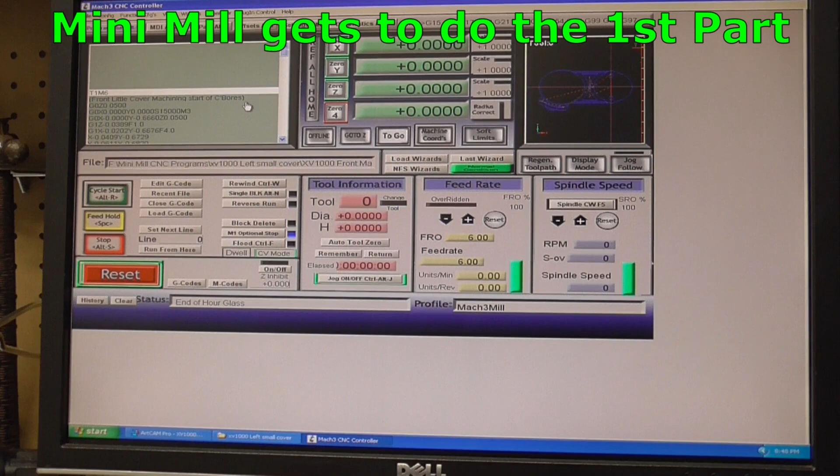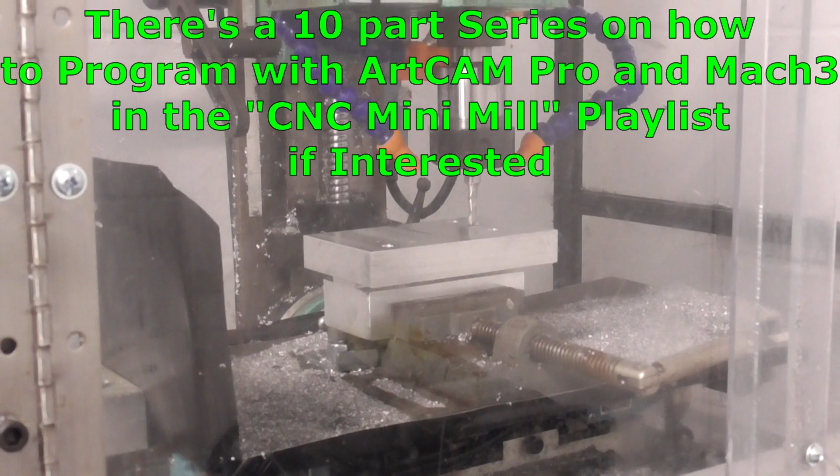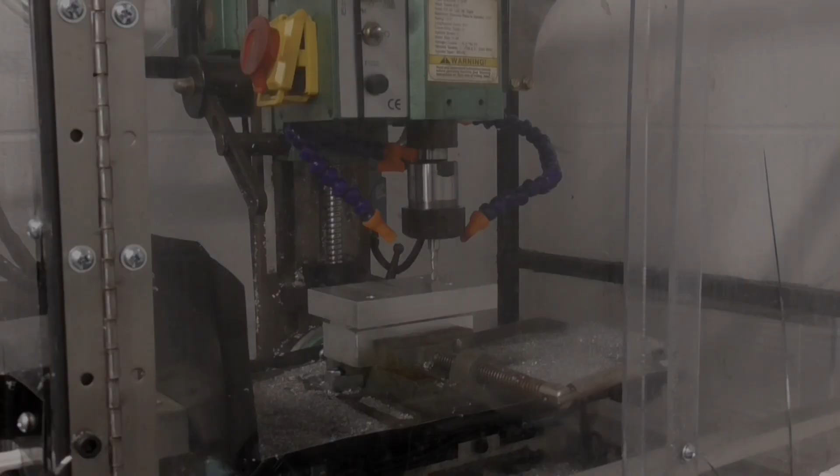So now, over on the Mini Mill, we've got our part set up, and I'm using flood coolant. I'll set the camera up and we'll let it take off and start cutting, and we'll just record as it goes. Let me get the camera set down here and get a good view, maybe it won't splatter too bad, and we can see as it cuts along on this program. I'll turn the coolant on so it starts cutting.

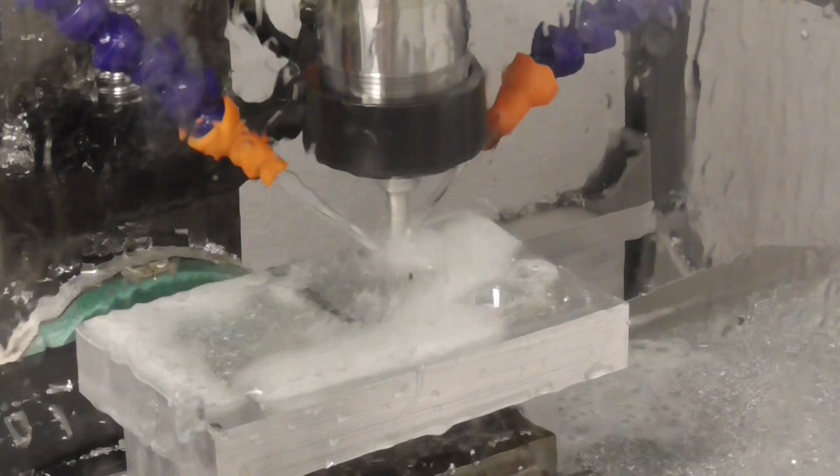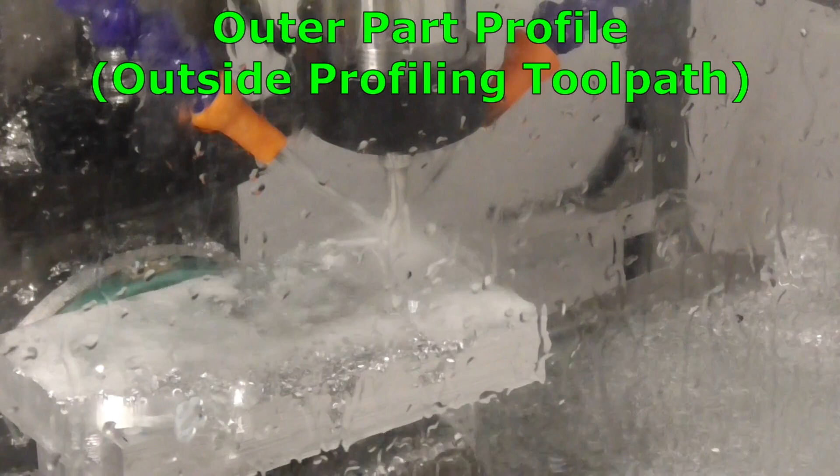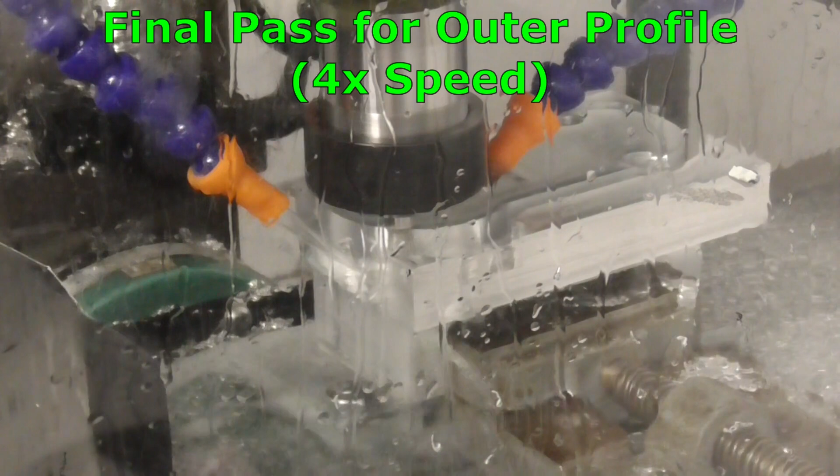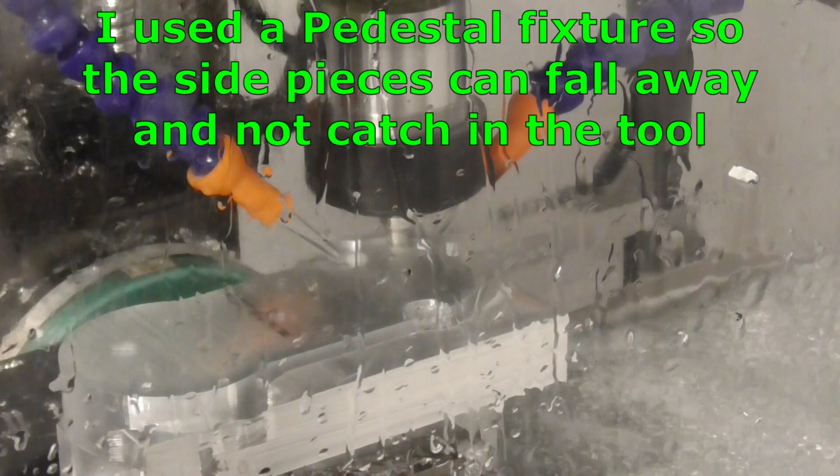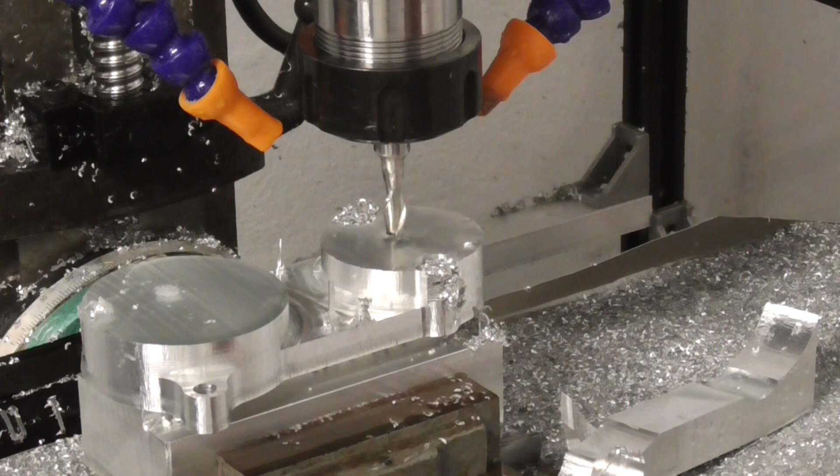And there we go, so we got our first step done. Swing the doors open so we can see what's going on. And it looks like everything went well.

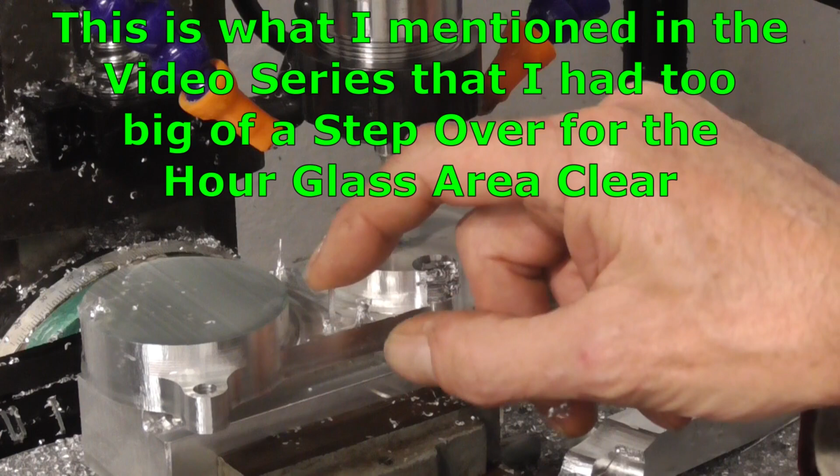This is just leftover from it going around, but it cut good. And right here it looks like I didn't get my step over quite right on that area clear in the middle, because it left some little pointy things, but I've got to sand that anyway, so I can adjust that in the program and get those off. They're just little pieces of aluminum standing up right there, but all in all it looks good.

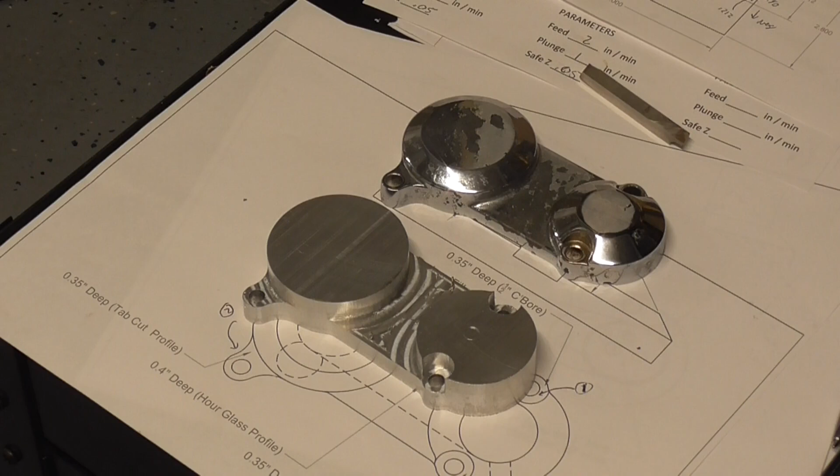So we'll raise up our Z-axis and get him out of there, clean him up a little bit, and see what it looks like. Alright, so after wiping everything off, we did pretty good on our first pass.

You can see right here these little nibs where I didn't do my step over right on this area clear, so I'll have to adjust that. But overall, the rest of the program looks pretty good, and I'm going to sand all that away and make it nice and pretty.

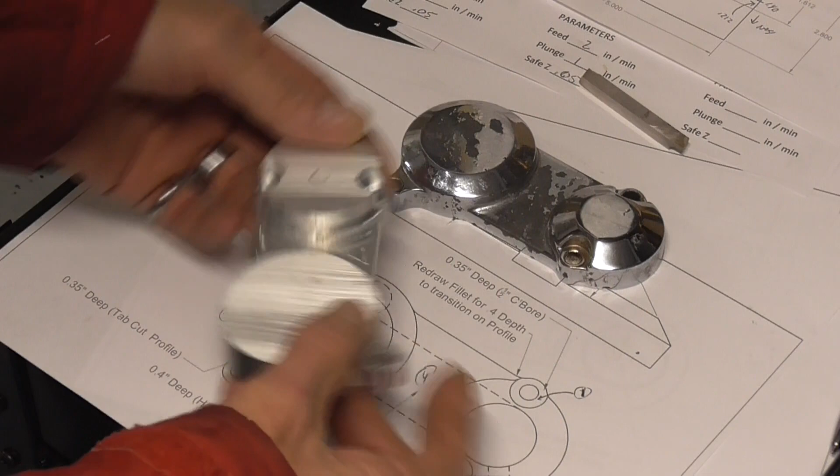And then our next stop is to head out to the lathe where I'm going to cut these tapers on by hand, because I can get a better finish than the Mini Mill can do. And then we'll bring it back and flip it over in the Mini Mill, and we're going to cut out these reliefs for the back of it.

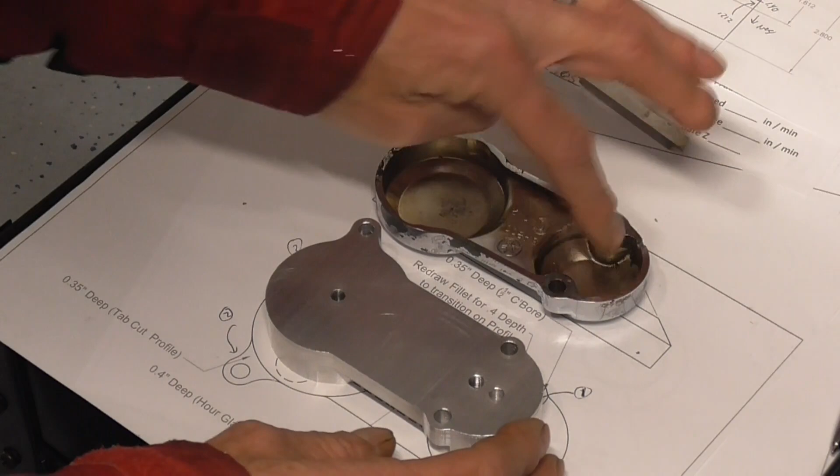Since the Mini Mill can't put a nice smooth surface on here like I can with the lathe, I'm going to cut these little angles on the lathe. I made a little fixture that zeroes the part so I can spin it around and cut that. I'm not going to spin it real fast because it's imbalanced on the lathe, but we just chuck it up like that and it'll spin around on that center point.

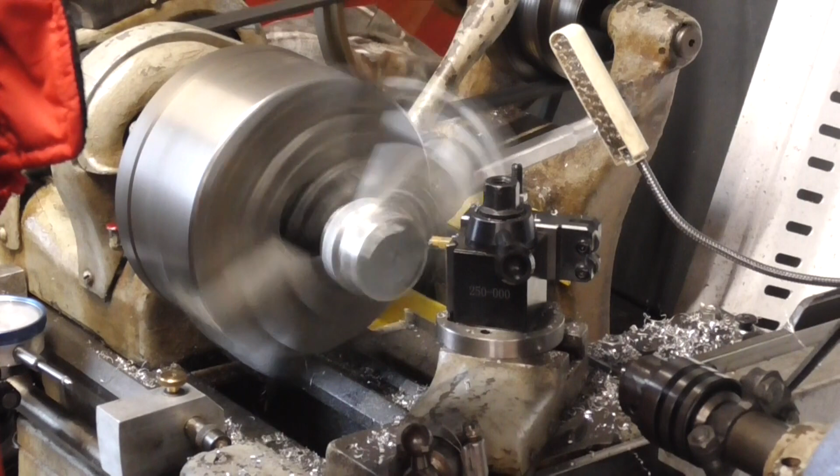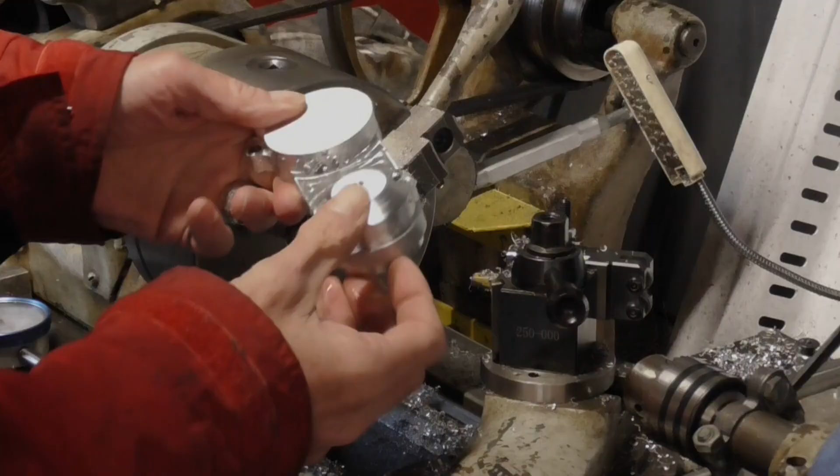And there we go, we've got a nice smooth surface that the lathe can do that the Mini Mill can't. So we just switch around and do the other side with the other fixture. We got our other side mounted up on its little holder and we're ready to cut that one. Looks like it's going to clear, so we'll take off and cut that one.

And there we go, now we got both of them cut. So we'll have a look and see what it looks like. Now it's starting to look more like a cover. So we got our two little bevels put on.

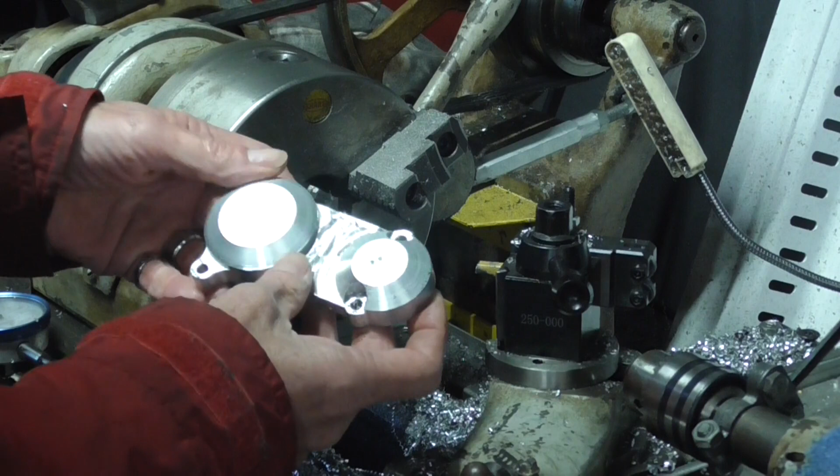Now we can sand this down, but before we do that, we're going to head back to the Mini Mill, flip it over, fixture it this way, and cut out the inside. We'll be back once we're set up with that program, and then we'll cut that out, and then all we got to do is clean it up.

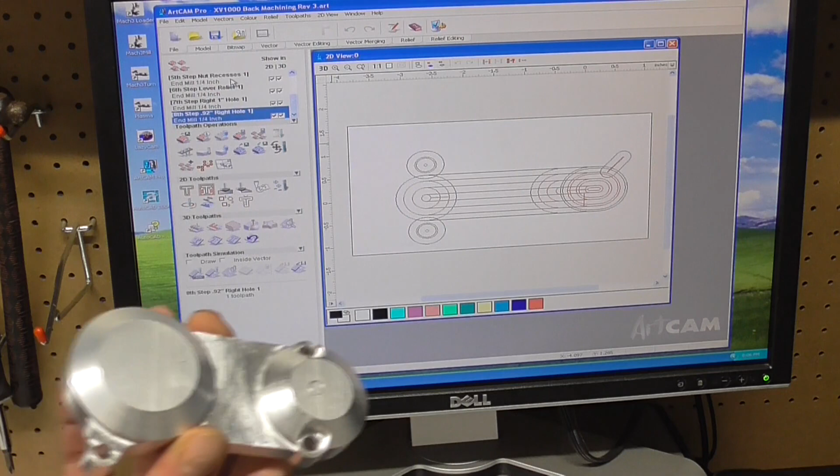Alright, so it's time to machine the back part of our cover. You can see we're done with the lathe work, and now all we got to do up here is sand it down, but I got to cut this back first. I've already cut one because I set up my program just to make sure, but it works the same way.

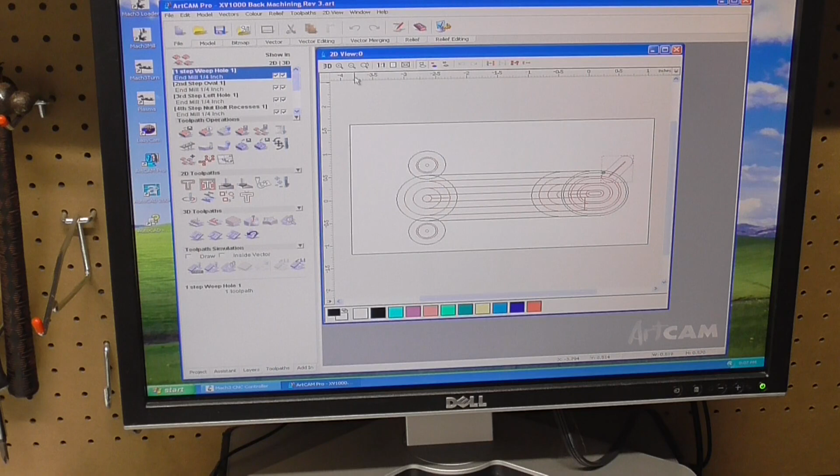You just start out in ArtCam Pro, or whatever your drawing software is, and set up your different tool paths, like the weep hole, that little mark right there, and the ovals and all the cuts. Get all that set up with all the starts and ends and tools and everything. Then you head over to the tool paths and save your tool path, that's where you load them in the order you want it to cut. You got to be sure to do that. Save it over, and it makes you a .tap file. Then you bring it over here and put it into Mach.

So we'll load up our G-code. Over here we can see we got it in the Mini Mill, and it's upside down so it can cut. I'm all zeroed up, got all my axes ready. I probably won't show this on video because all it's going to do is fill up with water like a little swimming pool, so you won't be able to see much. I'll start it out and edit it as we get toward the end, and then we'll see the part. So let's get set up here, get the Mini Mill turned on, and we'll start cutting.

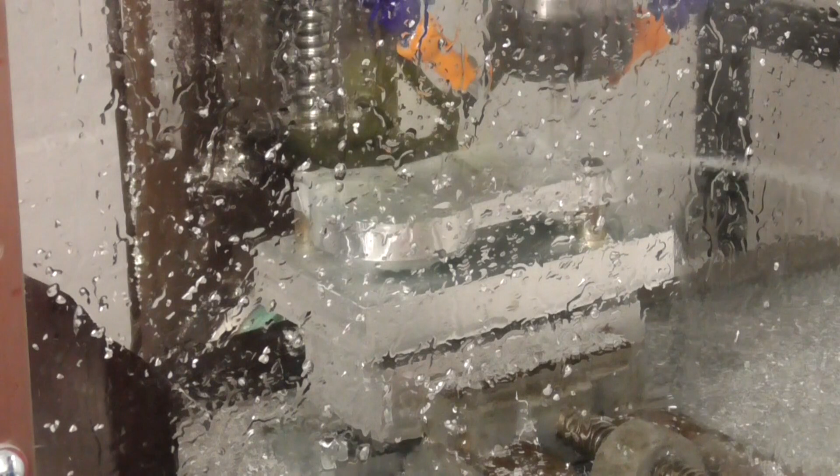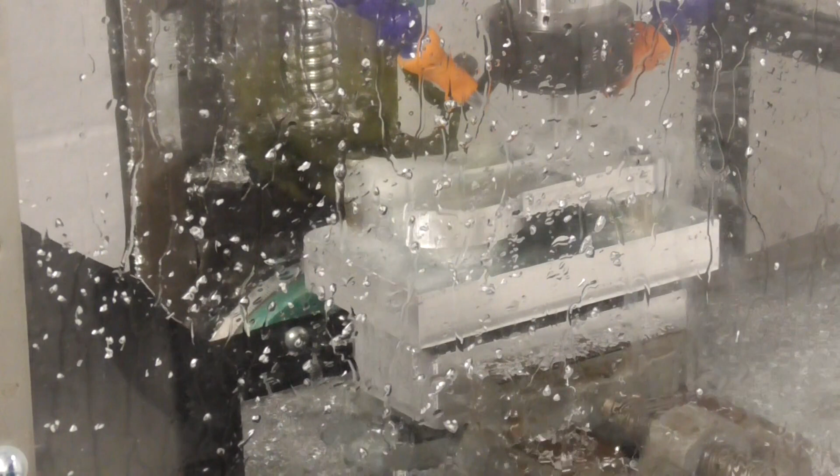Alright, so the Mini Mill finished up the backside based on the program we wrote. Everything did good. So now we just got to take it out, hand sand it, and then polish it, and we'll be finished up with this little cover.

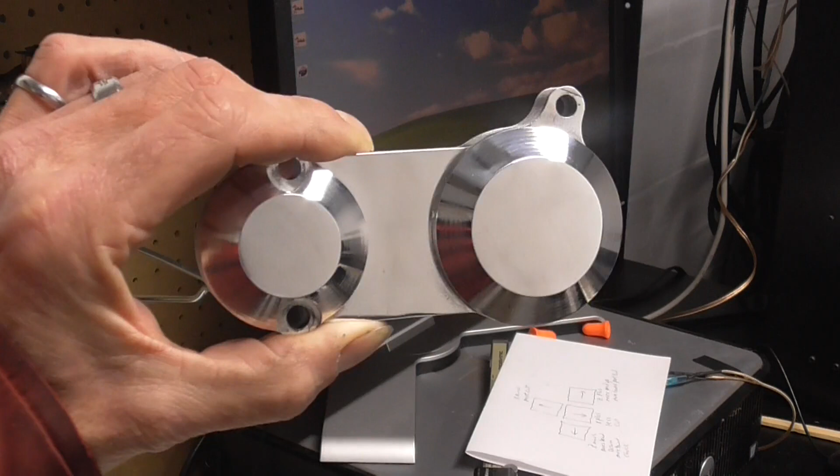Alright, so after a little polishing with the polishing wheel, we can see we got our cover all finished up. So the Mini Mill did a good job of reproducing it, and the program worked out good.